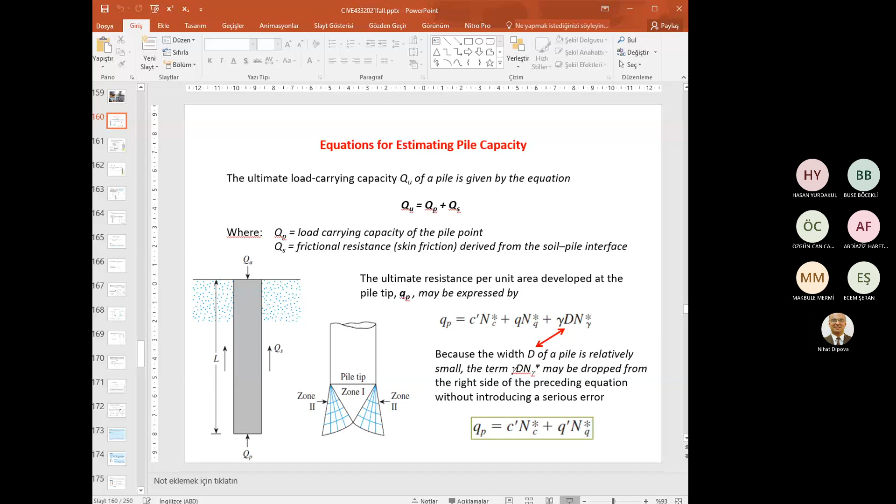Today's lecture we're going to continue with pile capacity.

I'll briefly summarize: the total ultimate load carrying capacity is the summation of end bearing and shaft bearing. End bearing is similar to spread foundation, and Terzaghi's bearing capacity equation can be applied with a little modification, especially for the N factors. Sometimes when diameter is relatively small, we can neglect this component and continue with the other two components.

What about frictional resistance? Frictional resistance depends on the frictional resistance between the soil-pile interface. So we need the unit frictional resistance, which we will calculate later, multiplied by the side area.

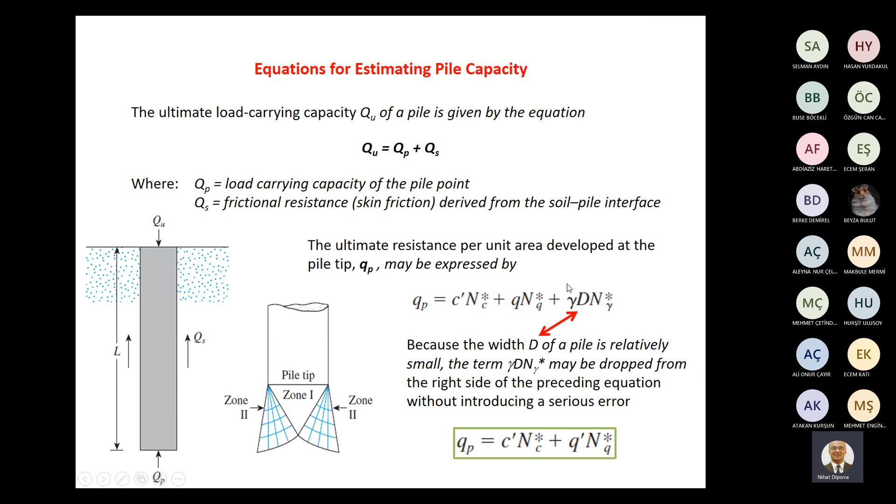This is important for clays. For clays, the end bearing capacity is equal to NC modified, times undrained shear strength, times area. This is just a modification of the Terzaghi equation, because the internal friction angle dependent terms cancel out, leaving only the first component. So the bearing capacity for clay soil is very simple: NC, Cu, and area.

This NC factor for zero internal friction angle soil, for clay soil, can be taken as 9. So the final equation is 9 Cu A.

What about frictional resistance? Frictional or side resistance in sand is calculated for every layer, and the total capacity is the summation of frictional resistance for every layer. Here we need the side area, which can be calculated as delta L multiplied by the perimeter. This is the side area for one single layer, multiplied by F, the unit friction.

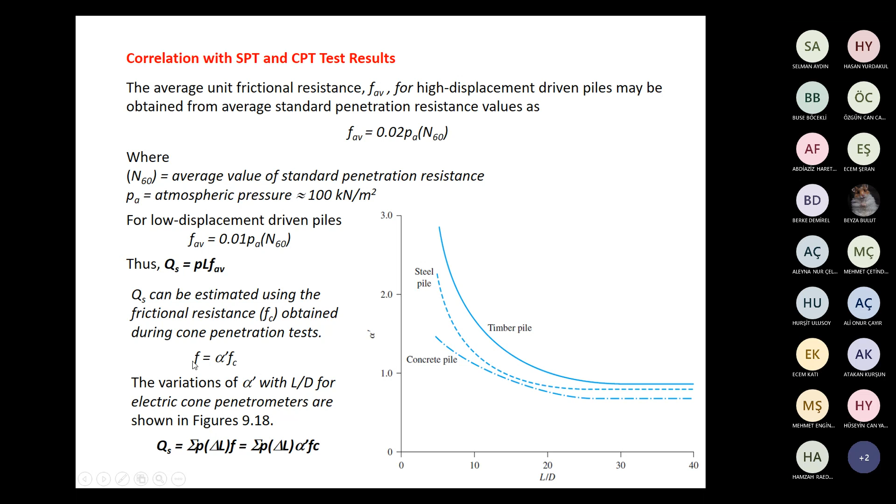Qs can be estimated using the frictional resistance obtained during cone penetration test. In this method, F can be obtained just by multiplying FC, the CPT test result, by alpha prime, a constant, and alpha prime comes from this plot, depending on pile material type: timber, steel, or concrete. As you know, timber is rare today. Steel and concrete piles are used generally. You can take alpha prime, multiply with FC, the unit friction, and thus Qs can be determined.

Frictional resistance in clay is somewhat complicated, and we use three different methods depending on drainage conditions and field conditions: alpha, beta, and lambda methods. Let us start with the lambda method.

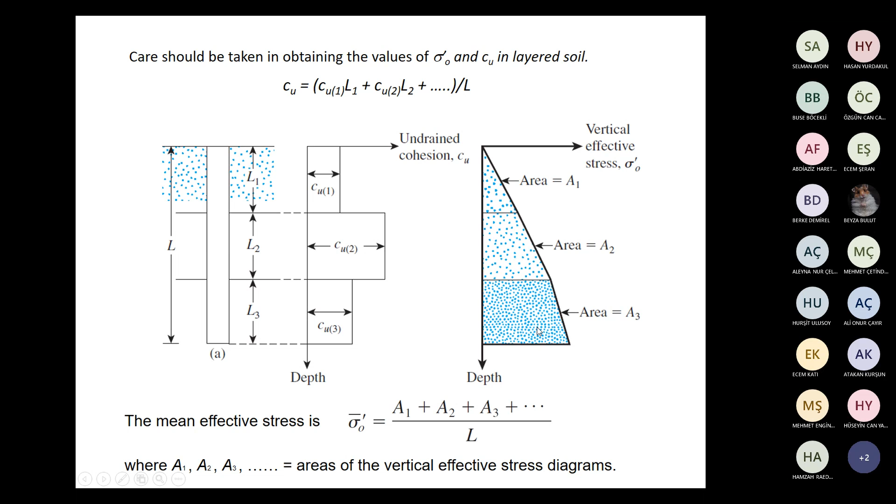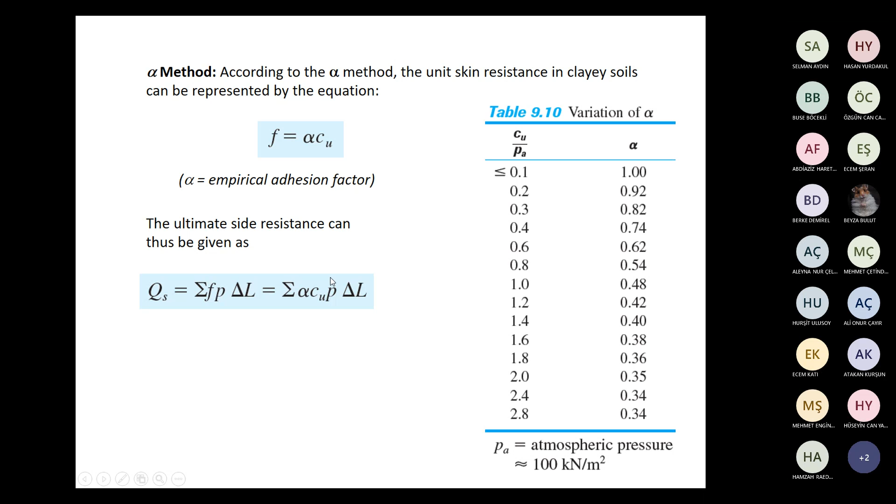These two are important for this simple equation. In the alpha method, the unit skin resistance can be represented by this simple equation. We will multiply undrained shear strength with alpha value. Actually, alpha is dependent on Cu value, and Cu corrected with atmospheric pressure gives better results, so we will use Cu over Pa values, where Pa is atmospheric pressure. We will take the alpha value from this relationship and put it here. So our final Qs equation is alpha Cu multiplied by side area, P delta L.

In the beta method, when piles are driven into saturated clays, the pore water pressure in the soil around the piles increases, up to 4 to 6 times Cu. However, this increase in pore pressure dissipates gradually. Hence, the unit frictional resistance for the pile can be determined on the basis of the effective stress parameters of clay in a remolded state. Remolded, in other words, drained condition. In drained condition, instead of undrained state - in undrained state, remember, internal friction angle is 0 and cohesion becomes undrained shear strength, a constant value.

However, in drained condition, cohesion will be approximately 0 and internal friction angle is a number, not 0. In the beta method, unit friction is equal to beta multiplied by effective vertical stress at any depth, and beta equals K, the earth pressure coefficient, multiplied by tangent of the drained internal friction angle.

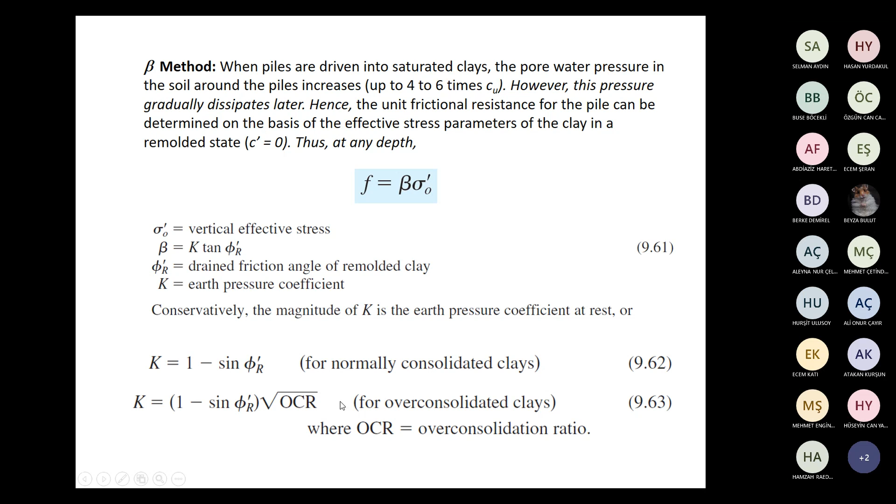Remember lateral earth pressure from soil mechanics. K can be calculated using this equation for normally consolidated clays. If our clay is rather aged, old clay, having some amount of OCR or over-consolidation ratio, we will multiply this equation with the square root of OCR. But as you know, over-consolidated clays are rare. Combining these equations, finally, for normally and over-consolidated clays, unit frictions can be calculated using these long equations, and total side friction, whatever method is used, with F from the method, multiplied by side area, P times delta L.

Let us make a summary of these three methods and try to understand which method should be used in which conditions. The alpha method is a conventional total stress analysis for the skin resistance of piles in cohesive soils. The skin resistance is related to the average soil undrained shear strength using one single coefficient, alpha, the adhesion factor.

The beta method is an effective stress analysis which considers the frictional resistance for the soil-shaft interface. In this method, the side resistance is a function of horizontal effective stress and effective stress friction angle for the soil-shaft interface. The lambda method is a combination of total and effective stress analysis that can be used for cohesive soils. In this method, the side resistance is related to undrained shear strength and effective stress as well.

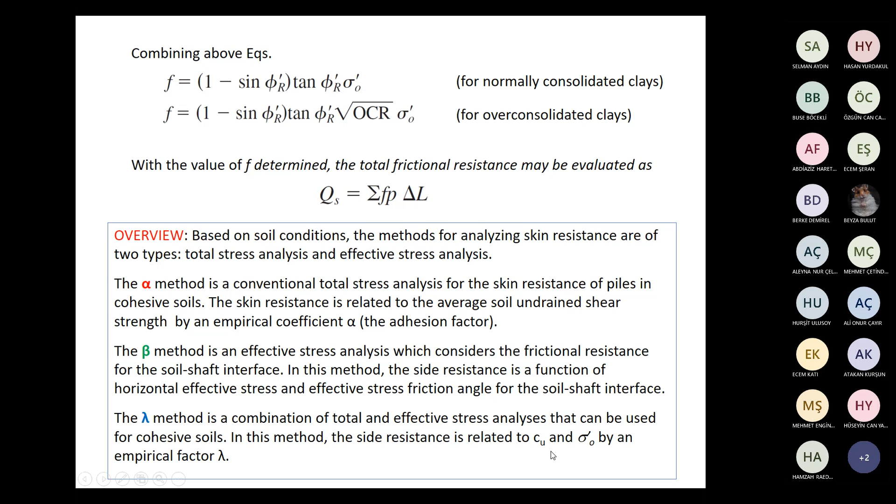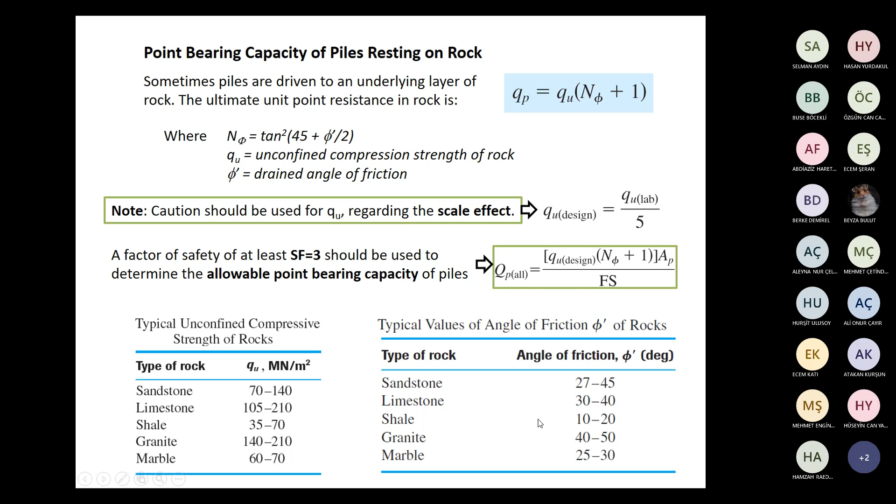Anyway, let us solve an example question about pile foundations. This example question is from your textbook, Example 9.1.

Pile length is 20 meters. Pile type is concrete, with square cross-section and 0.407 meter diameter. Soil type is sand. Unit weight of sand and internal friction angle of sand are given parameters.

We will calculate ultimate point capacity using Meyerhof's method. In Meyerhof's method, we have a limiting value, and the calculated value from the main equation will increase with depth, but should be less than or equal to the limiting value.

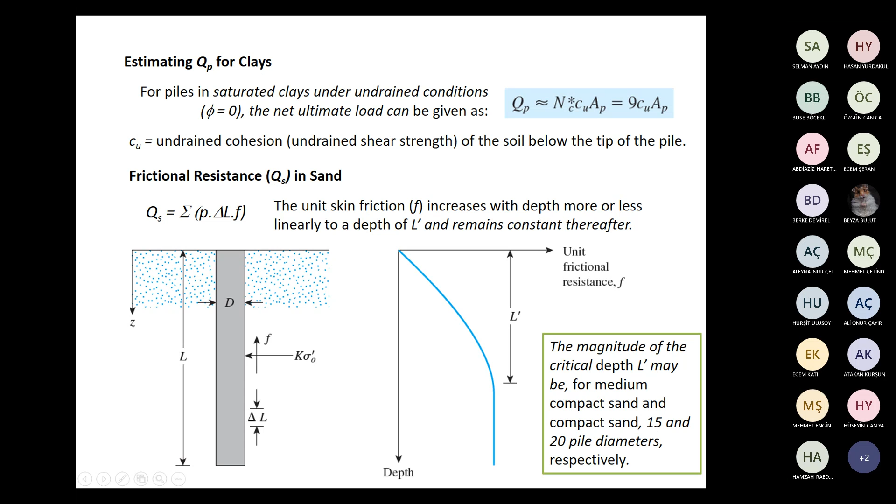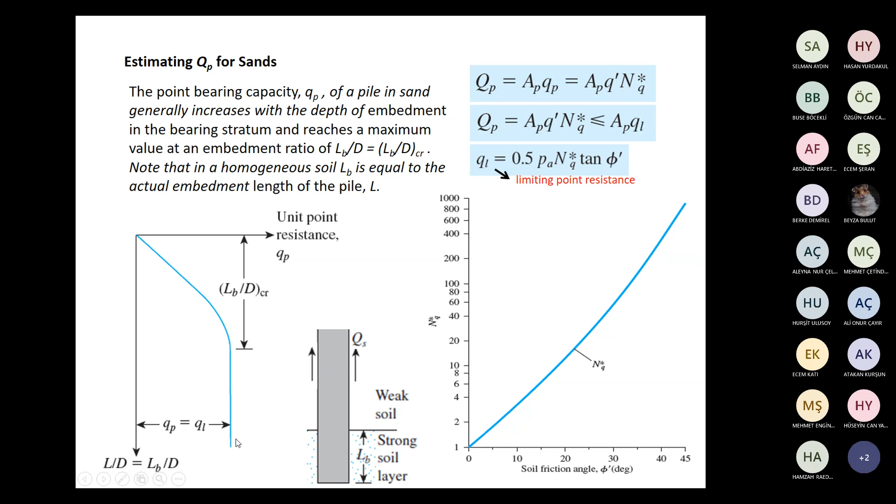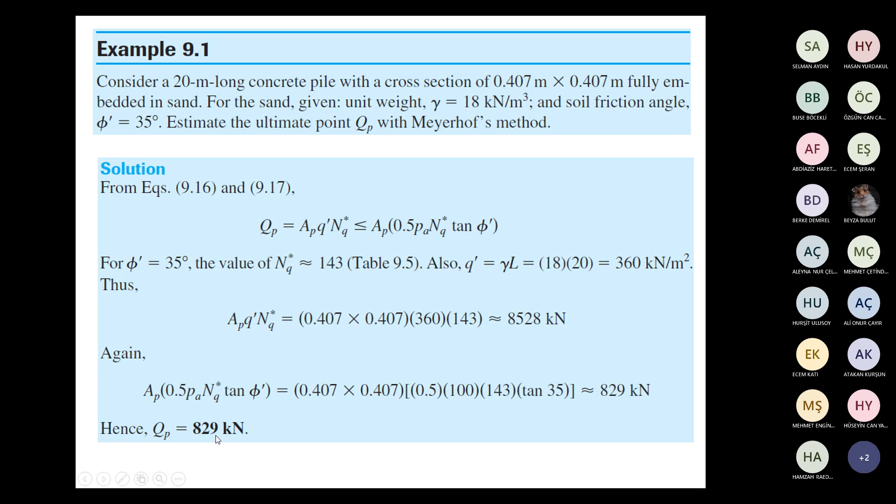Let me show a similar plot. The capacity increases with depth according to this equation, but after the critical depth it stays constant. So we have to use this constant value as the design value. QP will be equal to 829.

Example 9.2. Consider a pipe pile with closed end, flat driving point, so it's a high displacement pile. The diameter of the pile is 457 millimeters, and the length is 20 meters.

We have 3 different layers, and unit weight and undrained shear strength values are given for every layer. The groundwater table is located at 3 meters from the surface.

Meyerhof's simple equation for clay type soil is 9 Cu Ap, where the undrained shear strength values to be used are 25, 40, and 90.

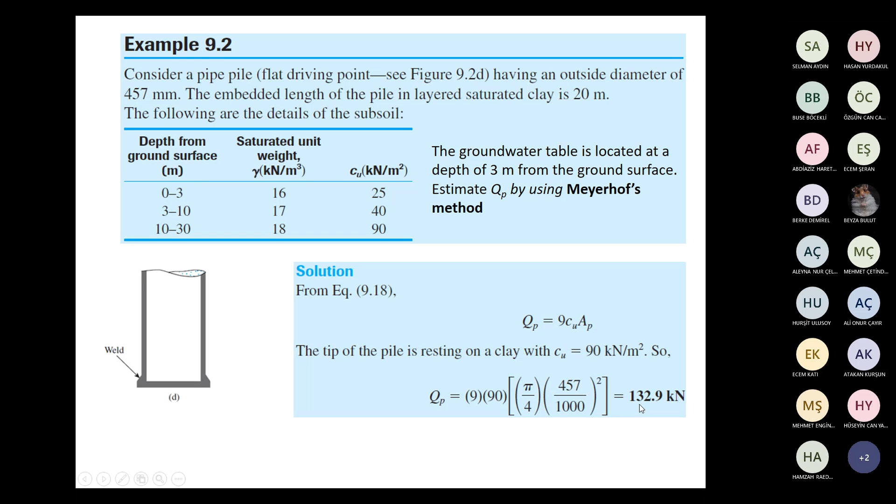Example 9.3. We have a concrete pile, square pile, with dimensions given. Length is 12 meters. In this table, N60 values are given, which are SPT results corrected for 60% energy.

In this example, we will estimate QP, end bearing capacity. For end bearing capacity, when we use SPT results, the average of the SPT values in a specific zone should be used, specifically 10D above and 5D below the pile tip.

Where is the pile tip? The pile tip is at 12 meters. 5D is around 1.5 meters, so our average starts from this value. What about the upper level? 10D is around 3 meters, so 10 diameters is around here, and these 4 values should be used in calculating the average value for QP.

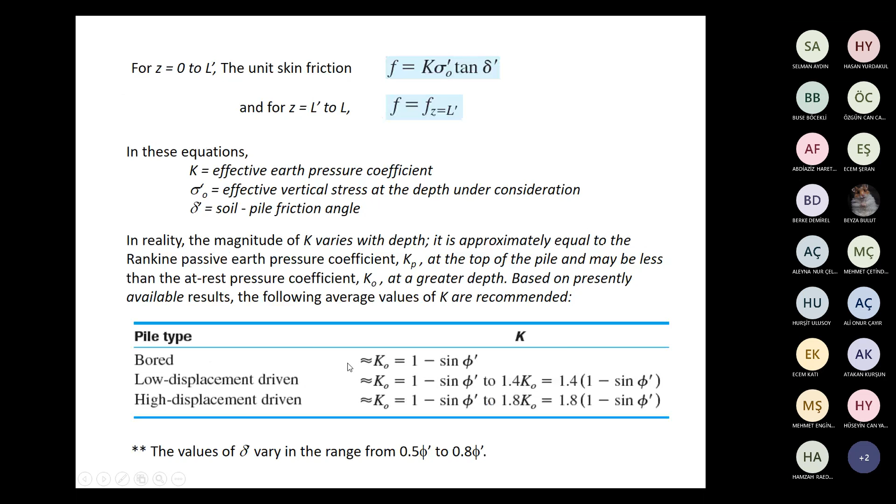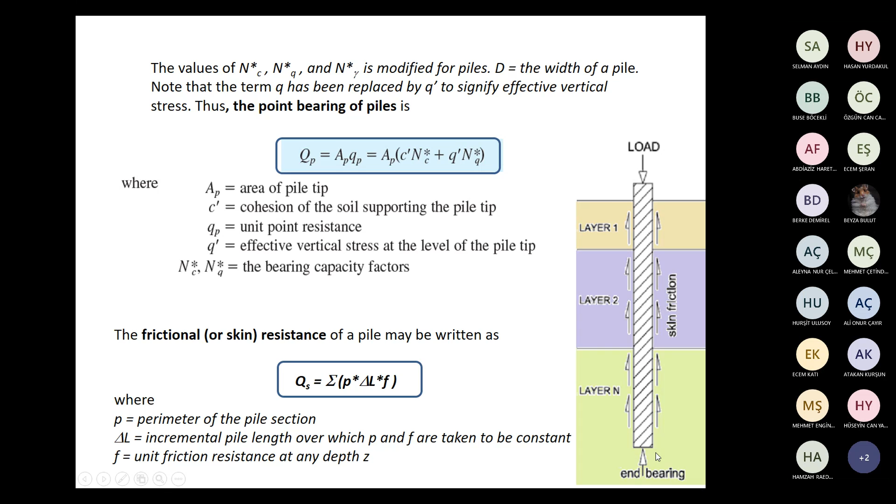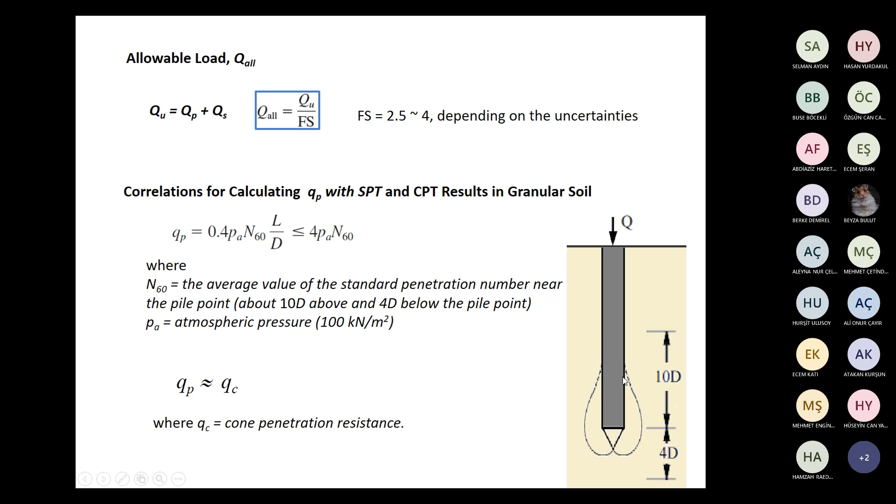Let me show this relationship: the failure zone is shown here as 4D, but sometimes it's taken as 5D, because the failure zone extends to the pile shaft around 10 diameters.

Let's come back to the example. The average of these 4 values is 16.5, approximately 17. Putting this into the equation, PA can be taken as 100, and using the average value 17, with known L and D, the result is approximately 633.

And this can be used as the design value. In the next example, we will consider this same pile from example 9.3 again.

But in this question, we will calculate the allowable load carrying capacity of the pile. So we need side friction.

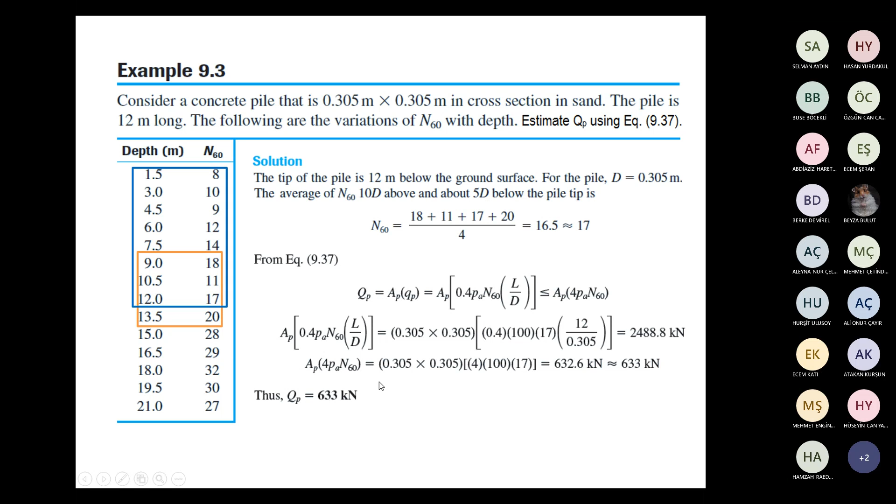Putting all the values here, QS can be calculated as 292.8, because we already calculated QP in example 9.3. We can take that value from here.

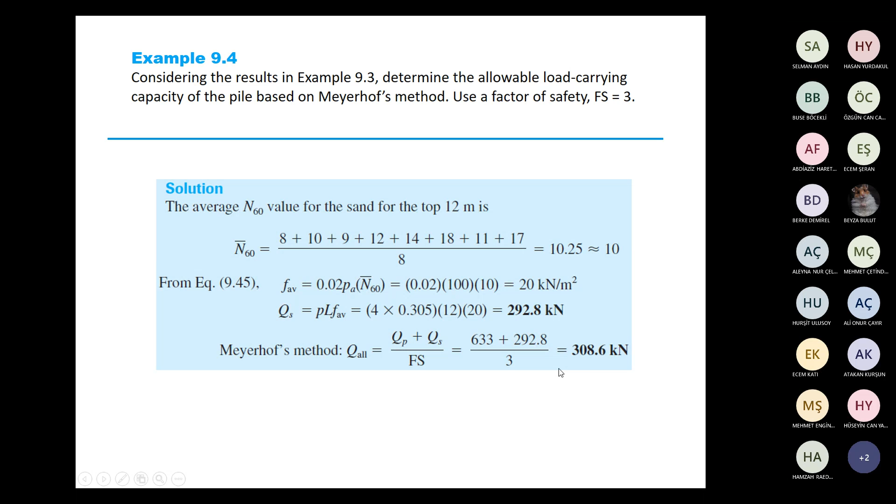QP plus QS gives end bearing and side bearing combined, which is the total ultimate capacity. Dividing by a safety factor, we can use 3, gives the allowable capacity of the pile: 308.6.

We have one more example. Again, a 12-meter concrete pile, having 450 millimeter diameter, with square cross section. Soil type is clay, and the water table is located at 5 meters.

Soil parameters, both unit weight and undrained shear strength, change at 5 meters depth. Above the groundwater level, undrained shear strength is 50 kilopascal, and below the groundwater table, undrained shear strength is 75 kilopascal. Similarly, unit weight values are also different: 17.4 above groundwater table and 18.1 below groundwater table.

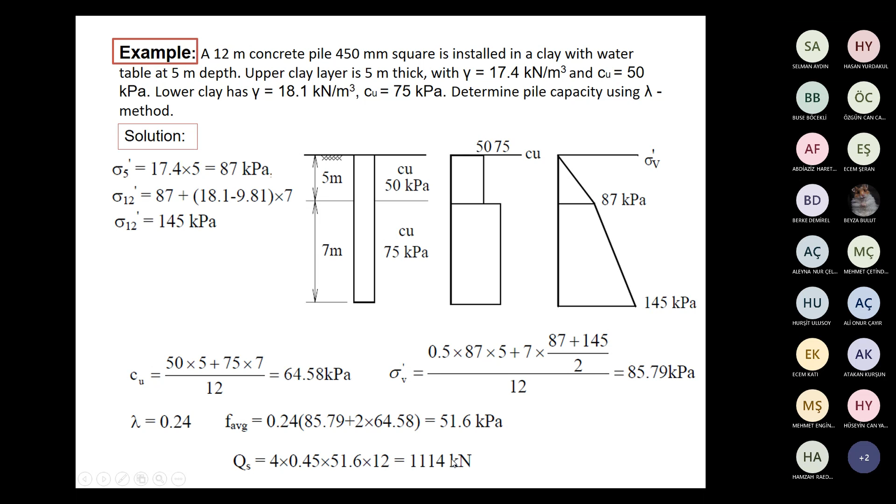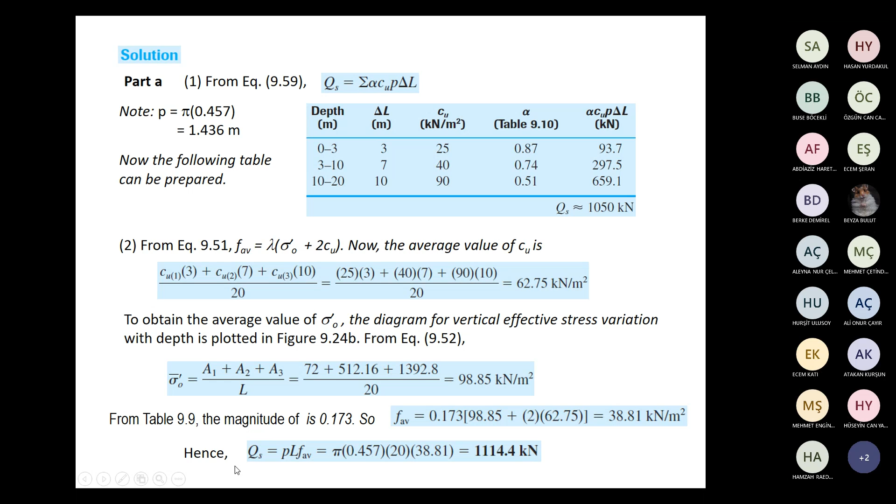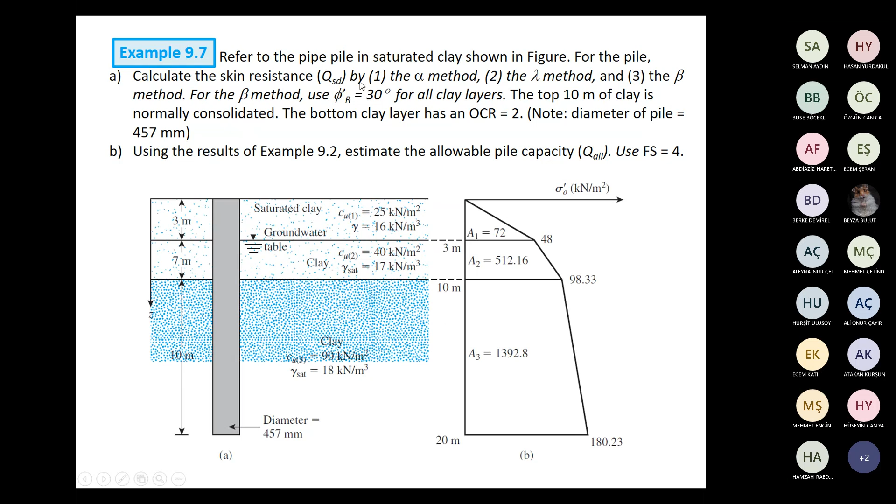In part 3, we will use the beta method, and we need to consider internal friction angle, but the remolded or drained value. It was given as 30 degrees.

Again we need the average sigma value for different layers, considering the over consolidation ratio. Of course, the first two layers are normally consolidated clay, but the bottom layer is over consolidated clay, so we need to multiply with square root of OCR for OCR 2.

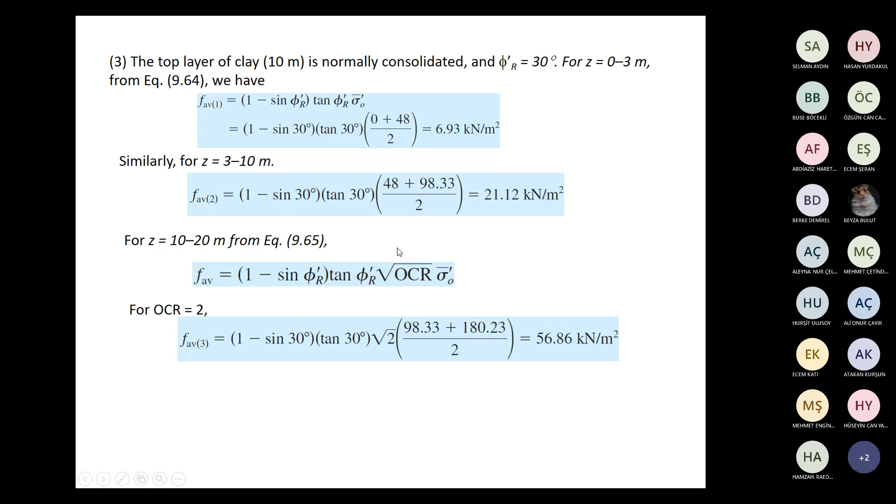Part B is ultimate bearing capacity. So we just calculated QS, but we need QP. QP can be taken from the previous example as 151, and just putting into the equation from the alpha, lambda and beta methods, these three values are almost equal, and the result is 306 kilonewton.

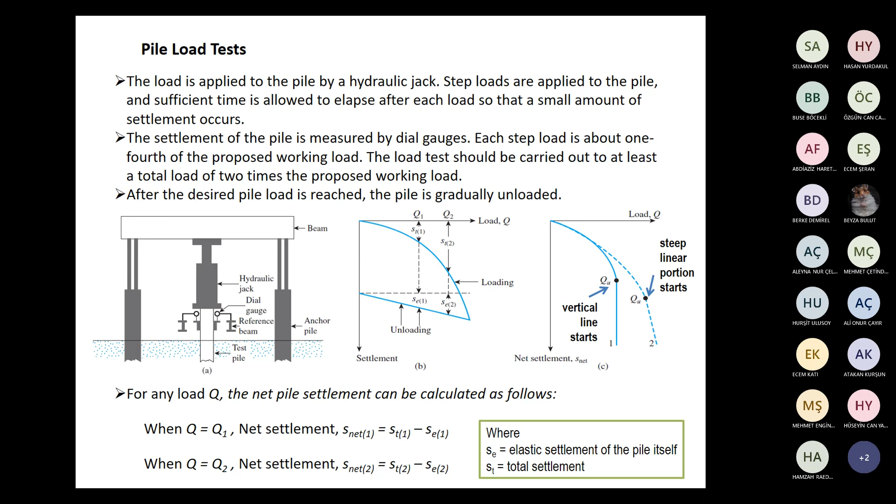Pile foundations show elastic settlement. The elastic settlement of a pile is the result of elastic settlement of the pile material, SE1, because pile material, concrete, is also an elastic material.

Settlement of the pile caused by the load at the tip of the pile: soil around the pile tip is also elastic material, so it may show elastic displacement, and SE2 comes from the elastic behavior of soil under the pile tip.

And settlement of pile caused by the load transmitted along the pile shaft - this is SE3. The final settlement of our pile will be the summation of these three.

If the pile material is assumed to be elastic, which of course we can assume, the deformation of the pile shaft can be evaluated using this relationship, which comes from elasticity theory.